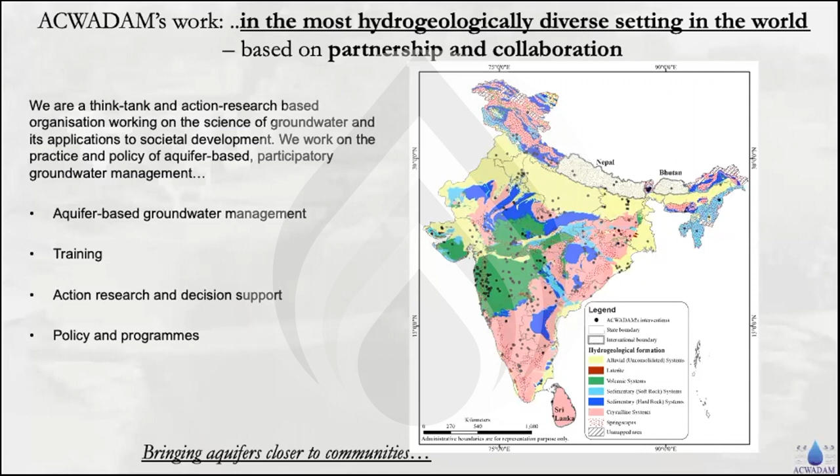We do a lot of training, capacity building. We also teach in some mainstream educational institutes in India. Our work on the ground is through the concept of action research and leading to decision support to communities. And because of a lot of our work in the first three bullets, we tend to get pulled into policies and programs. So with that brief introduction, let me jump into the subject matter straight away.

I want to begin with a quick deck of slides, where I'll talk about the importance of groundwater. It's a well-known fact today that more than half the world's population is dependent on groundwater. So pictures from across the world, from India, from the very tribal interiors of Shivpuri district of Madhya Pradesh to the central highlands in Vietnam, which in the 60s, 70s was the place not to be.

A lot of dependence in the central highlands of Vietnam is on groundwater. And the setting is very similar to where I live in Western Maharashtra. So the geological, hydrogeological setting is very similar. So we also draw upon a lot of the similarities while highlighting the differences when we look at our own work on groundwater. Western countries, Montpellier in France, still receiving a part of its water supply from a very ancient system derived from spring water. This is Marathwada and this is Tumkur in the state of Karnataka.

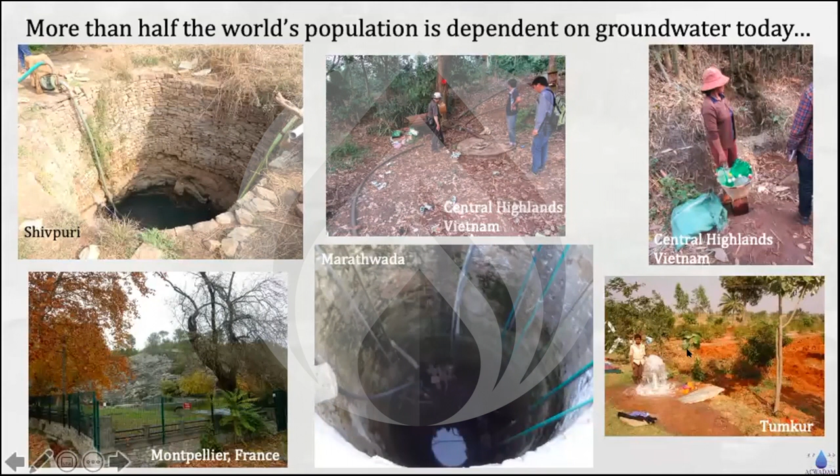So this entire dependency on groundwater across the globe means that every year at a global scale, 1,000 cubic kilometers or 1,000 billion cubic meters of groundwater is extracted. Of course, it's not uniform. As you can see, Asia alone extracts about 65% of the annual extraction. So on the continent of Asia, you see a lot of that extraction. Again, 50% of this total annual extraction is meant for irrigation or agricultural water on the continent of Asia alone.

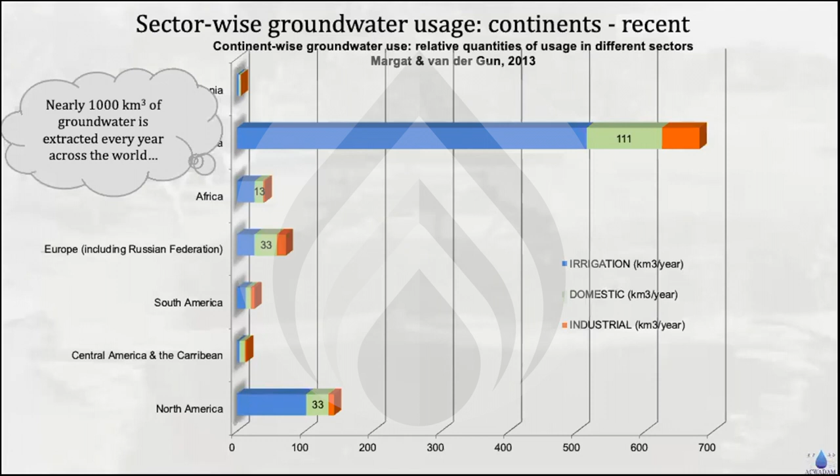The green represents domestic and the orange represents industrial. Of course, this has been taken from secondary sources, somewhat outdated, 2013. I'm sure this has changed, but it gives us a very good canvas. I would, for example, say this is perhaps the most extracted material from inside the earth. Groundwater is.

And therefore, if we step back and look at the history of groundwater across the world, the history of wells across the world goes back to about 11,000 years. And this is based on archaeological evidence and dating and so on. But in India, it goes back at least 3,000 to 4,000 years, the history of wells. So you actually have evidence that today's civilization has also a lot to do with groundwater usage over the last 5, 6, 7 centuries.

Now, I think, again, taking another step back, if you look at the legacy of groundwater usage until the 19th century, there was something unique about that history. Let's take a history of 15,000 years before present, which was the start of agriculture, which was the start of settled human living across the globe.

I'm just going to show you 2 pictures and then show you the text on the slide. So this is a very old spring in Uttarakhand, a community spring. And even today, we see mechanisms. This is below the headworks into the well section, a Persian wheel or a rahat or a mhot, as it was called in my part of the country. And you still see vestiges of this almost 2, 3, 4 centuries old tradition of wells and springs in many landscapes.

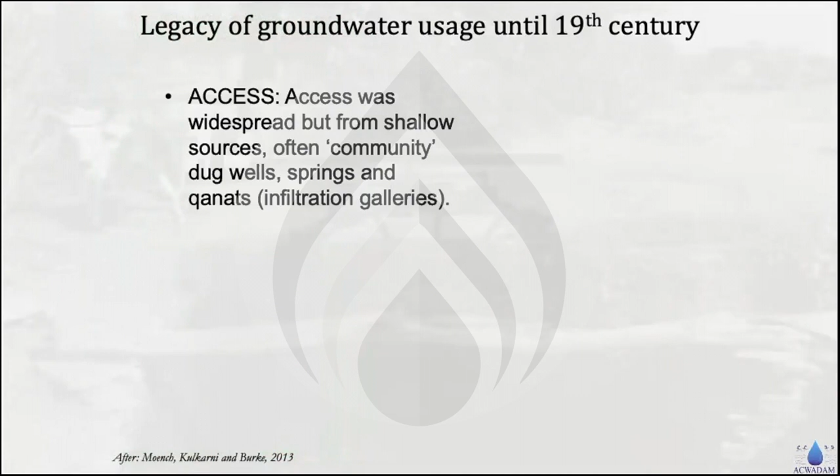And just to cull out a summary out of this work, till the 19th century, access to groundwater was widespread, but it was from shallow sources, shared or community sources, usually from hand-dug wells, springs, and in the western part of Asia and part of the Middle East, called qanats and karezes and different names. What today in engineering sciences or hydrology are called infiltration galleries.

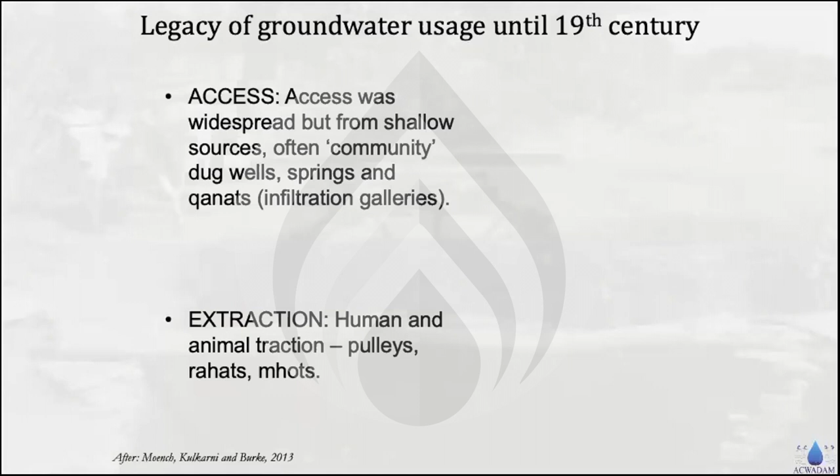Extraction was not mechanical in that sense, not driven by external fuel or power, but driven by animal traction, human traction, use of pulleys, gears. So the rahats and mhots are an evidence of that. So there was a peculiar manner of extraction. There was a peculiar manner of accessing groundwater. And this legacy, it happened over a long period of time.

Now, let's jump to the modern period. Let's jump to the last 60 to 70 years. And this is part of a larger documentary that we had made about our work, about the groundwater story in India. So I'm going to very quickly show you a snippet from this larger documentary, which will give you a summary of the last 70 years of the groundwater story in India. Many people have written about it. We ourselves talk about it, but it might be useful for all of us to go through it once more.

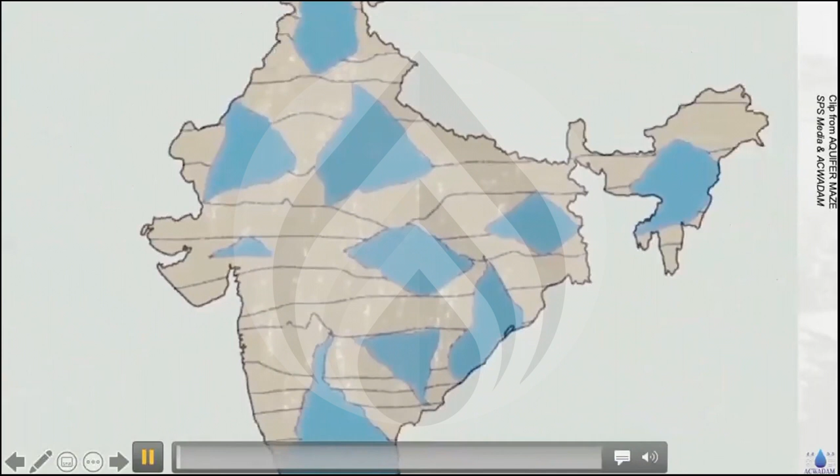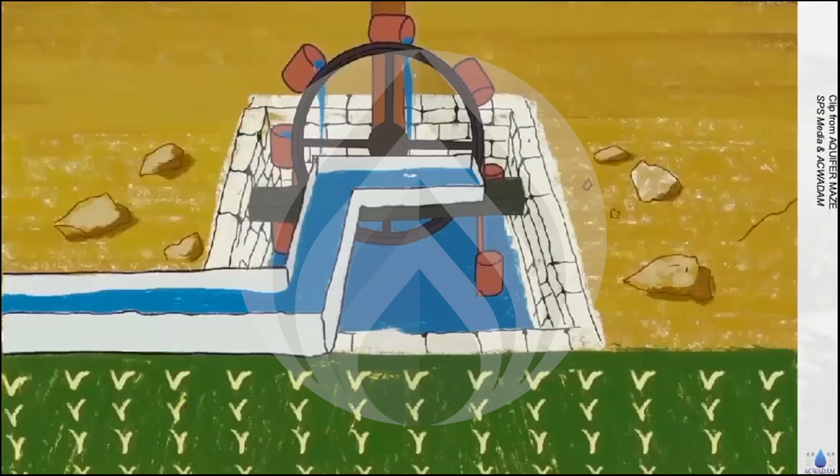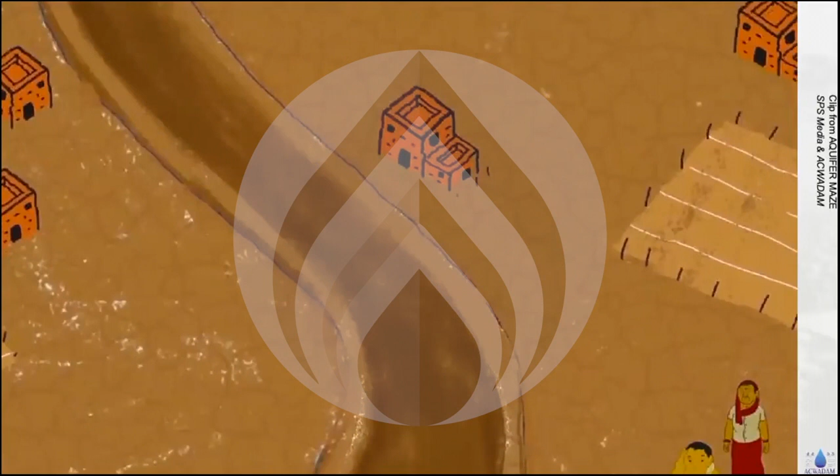India's groundwater story is quite unique. India extracts almost a quarter of the global extraction of groundwater. And what makes this story unique is the fact that India was not such a groundwater dependent country even at the time of independence. When India became independent, our vision of water management was about dams and constructing dams and canals in order to take water to people. But I believe that didn't happen for various reasons. And therefore, the last mile delivery of water wasn't achieved for many years. So the gap was actually filled by groundwater.

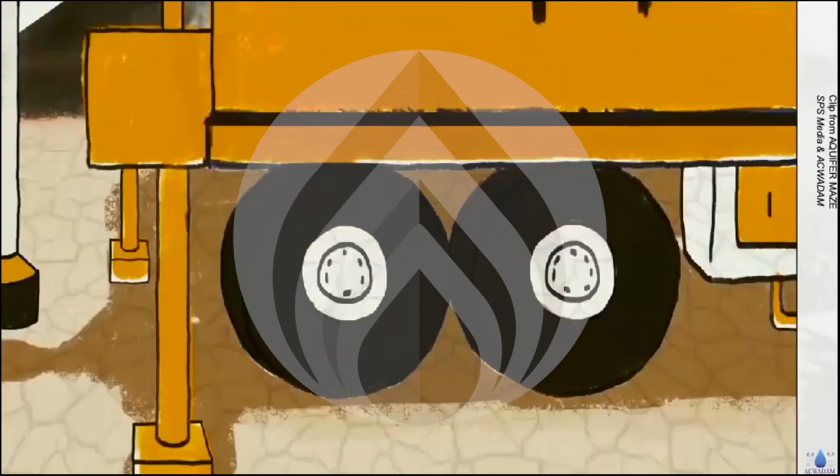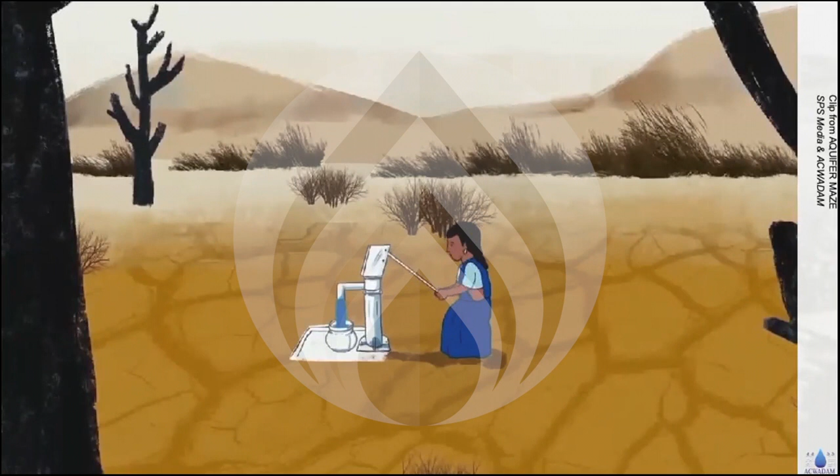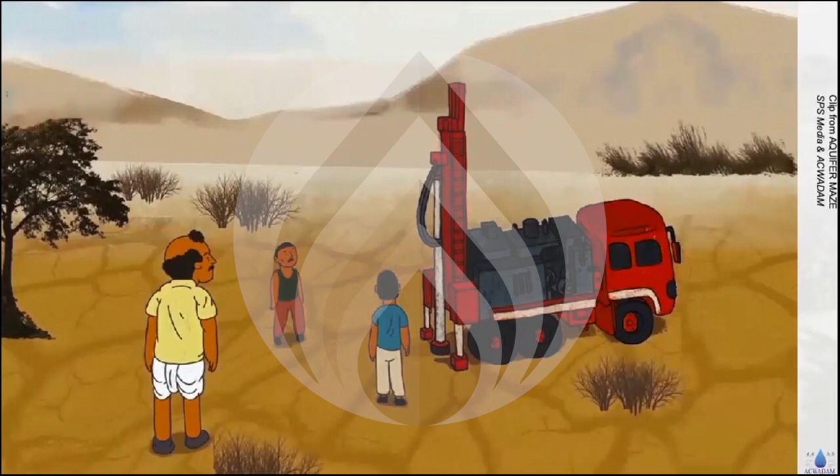Subsequently, in the 1950s and 60s, as the push for green revolution in terms of achieving food security increased, technology kicked in. And in the hard rock areas of India, for example, the borewell technology came. Droughts were also a factor or a stimulus for technology. For instance, the 1971-72 drought in Maharashtra and in large parts of western and southern India prompted infusion of the hand pump for access to drinking water. And in order to actually put in a hand pump, we brought in the technology of borewell in hard rock regions of India.

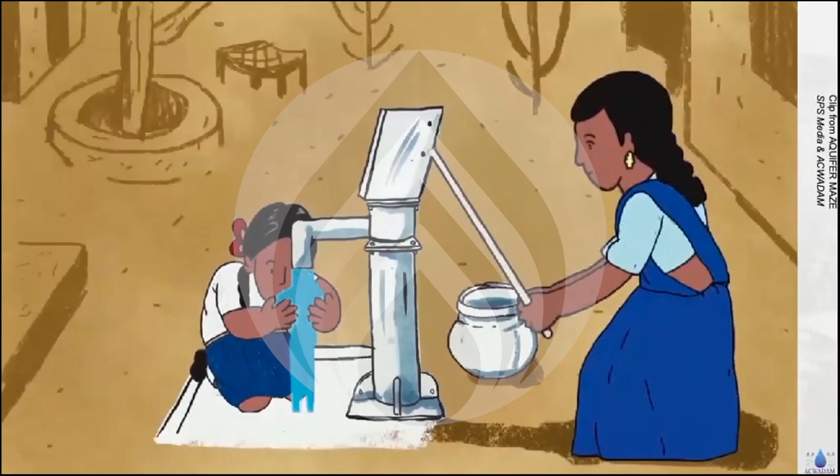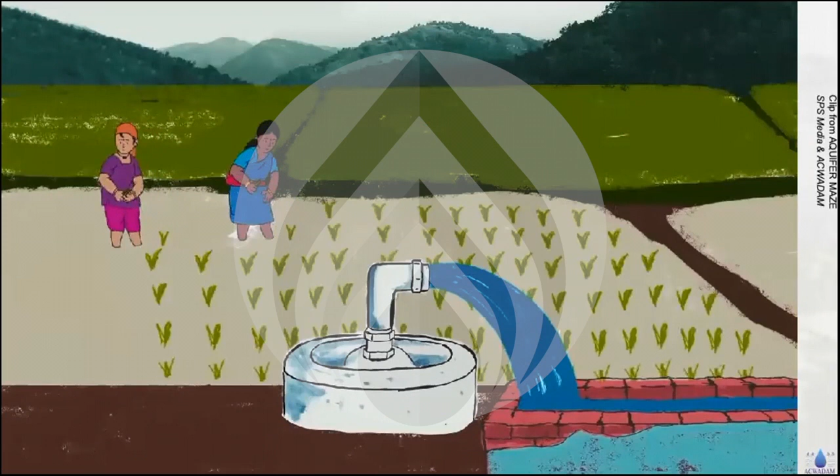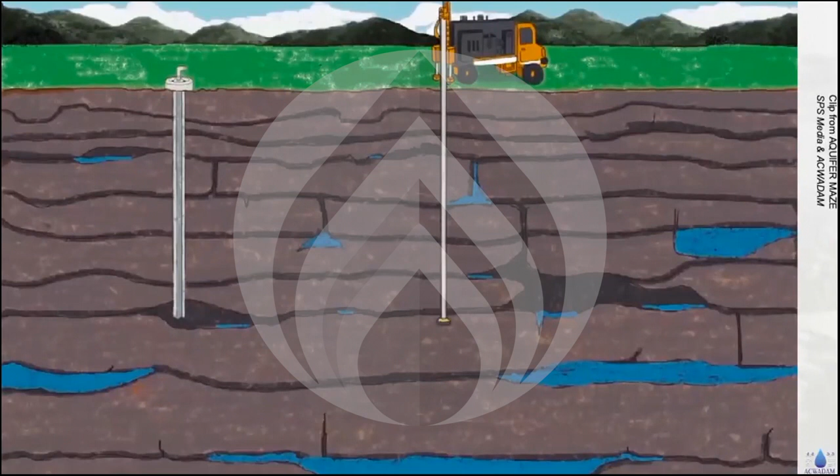Technology proliferates very rapidly. And the technology that came in for drinking water sourcing in the drought-prone regions of India quickly was taken up as technology that could access water for all regions. Urban, industrial, and moreover agriculture. As we deepened our existing wells and we drilled deeper through our boreholes, our groundwater extraction really grew.

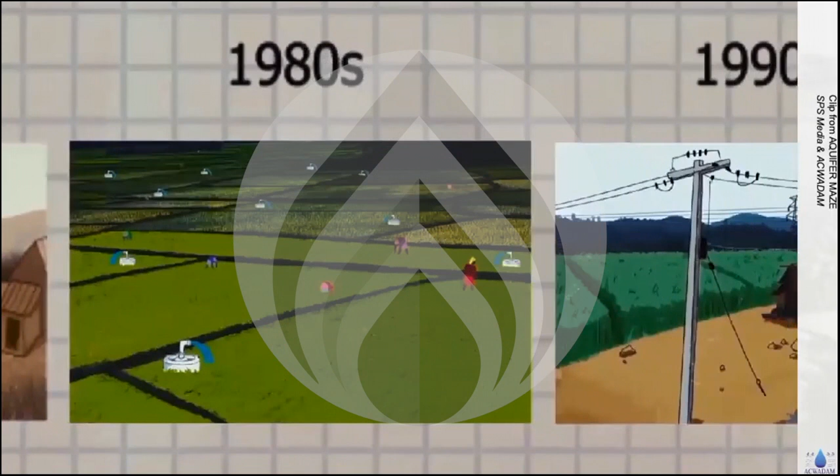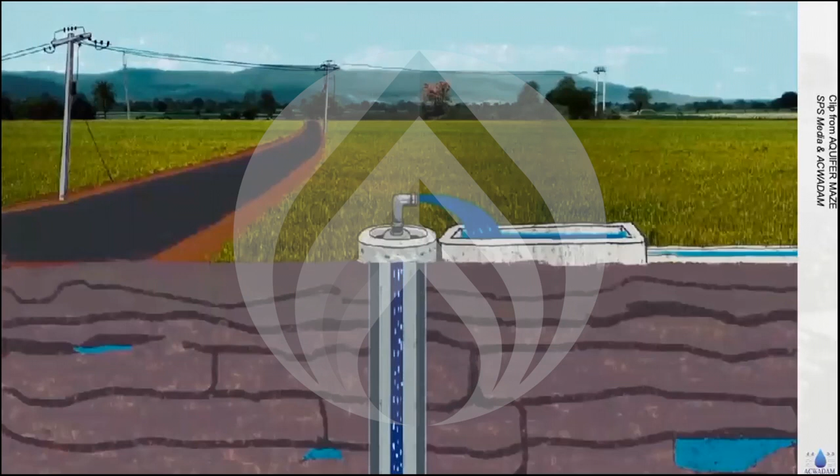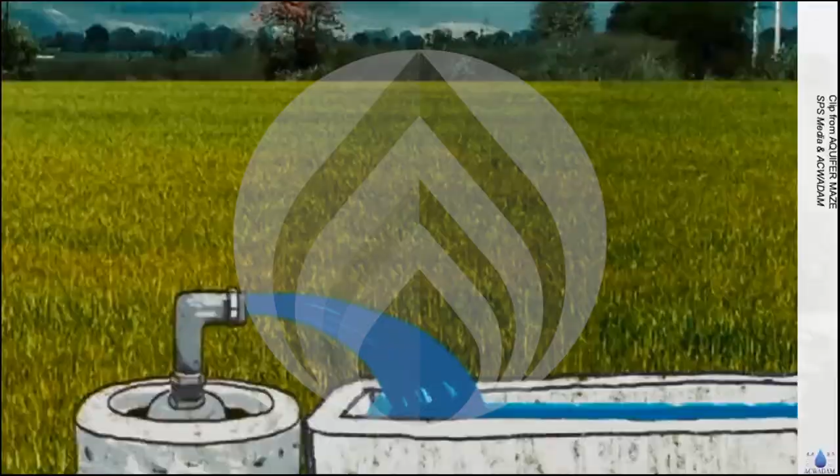Around the 1980s and subsequently even in the 1990s, with the advent of electric pumps, especially with the advent of submersible pumps, people could actually drill deeper, put in pumps at whatever depth they wanted and extract water from greater and greater depths. So in some ways, it was a race to drill deeper and a race to the pump house to install pumps of higher capacities and so on and so forth.

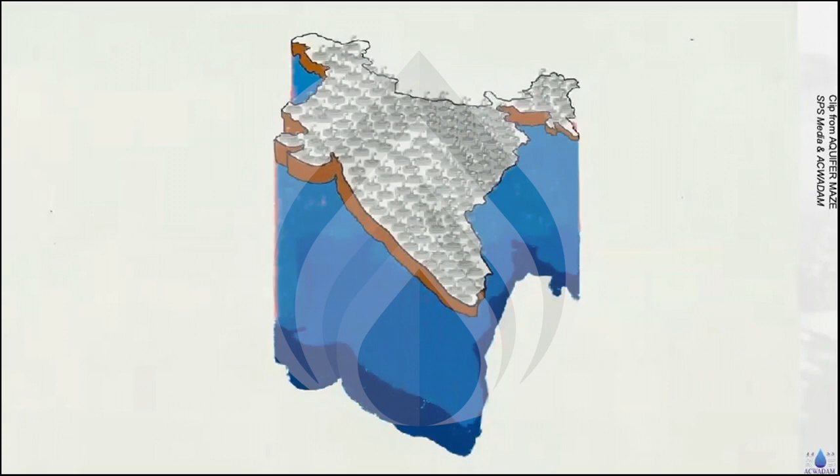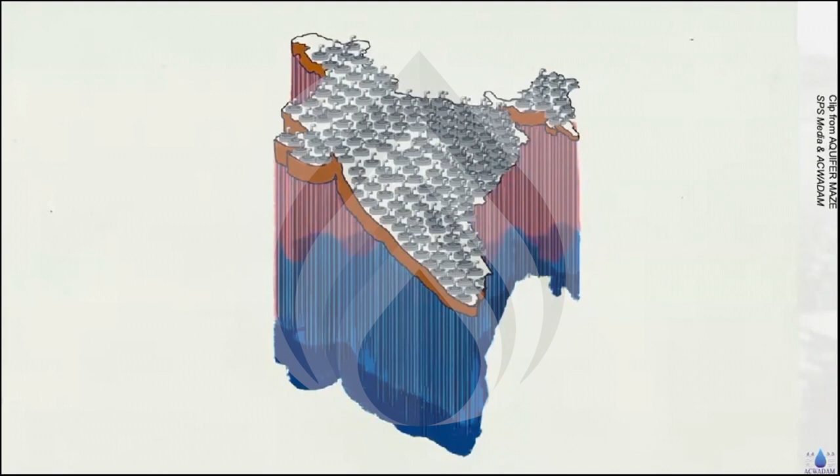So today, India is perhaps the largest user of groundwater in the world, which is a well-known fact. But we also have the largest density of wells, so roughly 30 to 40 million wells in India. And we have technologies that can access water from depths of thousands of feet, making it a very, very unique proposition.

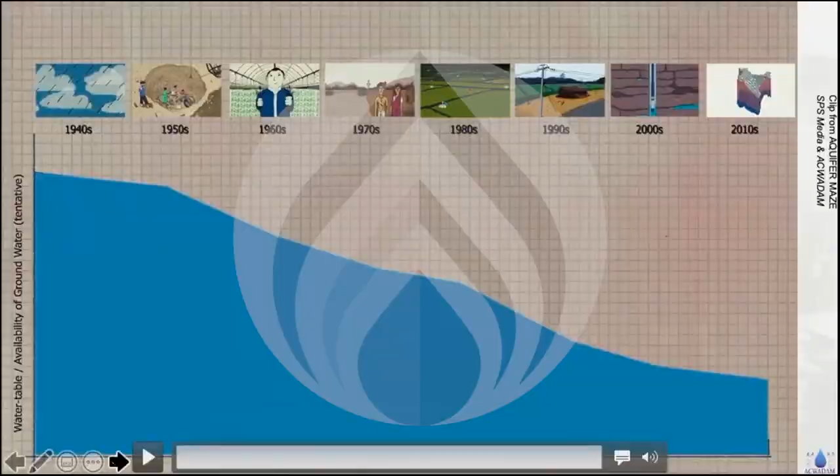So to move ahead, you've watched the video a bit, and let's leave it there at the moment.

On the other side, if you look at India's oft-unfathomed groundwater dependence, more than 90% of rural drinking water supplies come from groundwater. 70% of the water in agriculture is groundwater. Almost half of our urban and industrial supplies are groundwater based.

So much so that in fairly recent times, we have also seen a lot of wells coming up in forest areas for wildlife, for tigers. We ourselves have seen it in the central Indian forest regions. We've seen it in Melghat. We've seen it in parts of the Corbett National Park.

And, coming back to these numbers, if we combine these numbers and we extract a demographic element out of that, you can say that 1 billion Indians use groundwater every day in some way or the other in our country. And that's a huge, huge water footprint.

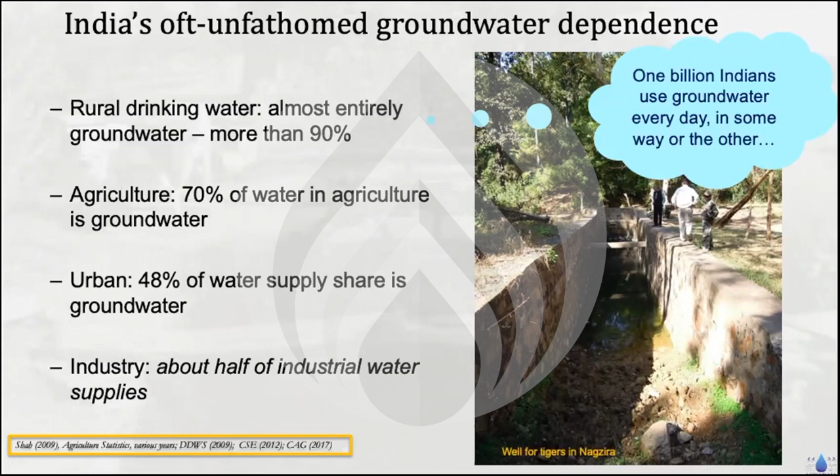Now, if we look at these two slides, then we begin to wonder, how has the legacy till the 19th century changed? And the legacy has changed on both the access and extraction counts. I could have actually presented data, but due to want of time, I haven't. But I can actually show you data on the basis of which I'm drawing these two inferences.

Access became individualized, so there were fewer and fewer community wells, and it also therefore got privatized in more ways than one. My well, my water, whatever's underneath my land is my water. And it happened through, as the film showed, deepening of dug wells, drilling of bore wells in parts of Karnataka, Telangana, Andhra Pradesh, and Maharashtra. There was a phase in which we had something called dug-cum-bore wells, where bore wells were drilled at the base of dug wells, and so on.

So shallow levels, intermediate levels, deep levels, we have tapped all the possible depths from which we can extract groundwater. And extraction, again, as the film showed, transitioned from animal or human power to mechanical devices like the diesel pumps initially, then the electric pumps, and then, of course, the submersible pumps. So high-end pumps capable of extracting large volumes of water over short periods of time. So that's another dimension where we began to extract lots of water within shorter time frames. And it's important to remember this.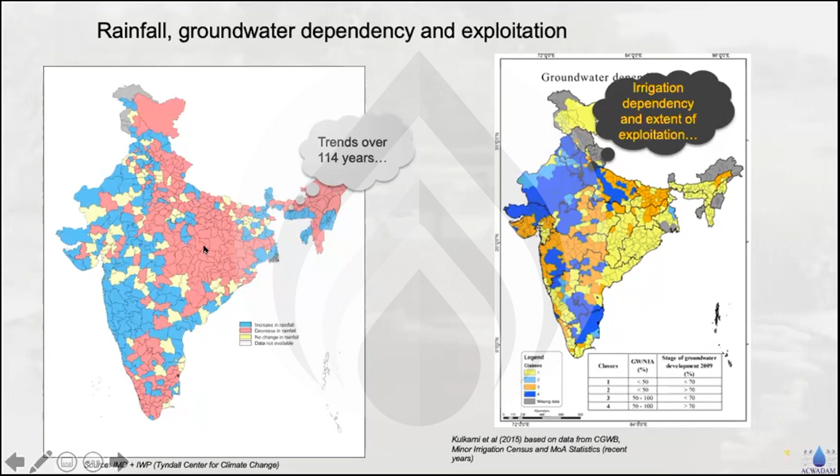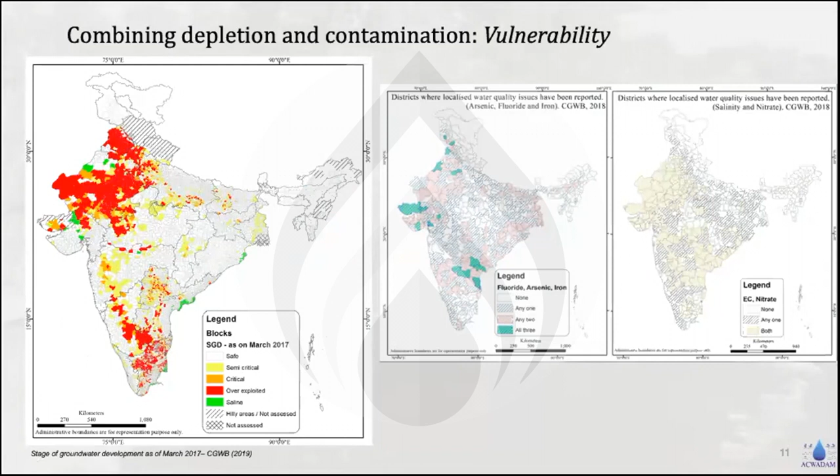If we then, as a second level, combine areas of depletion or overexploitation and areas of contamination. So this is the CGWB's data from 2017. And if we combine it with their own data sets on arsenic, fluoride, iron, salinity, and nitrate, at a very, very gross level, we can say that 60 to 70% of the districts in India have become vulnerable to either a depletion problem or a contamination problem.

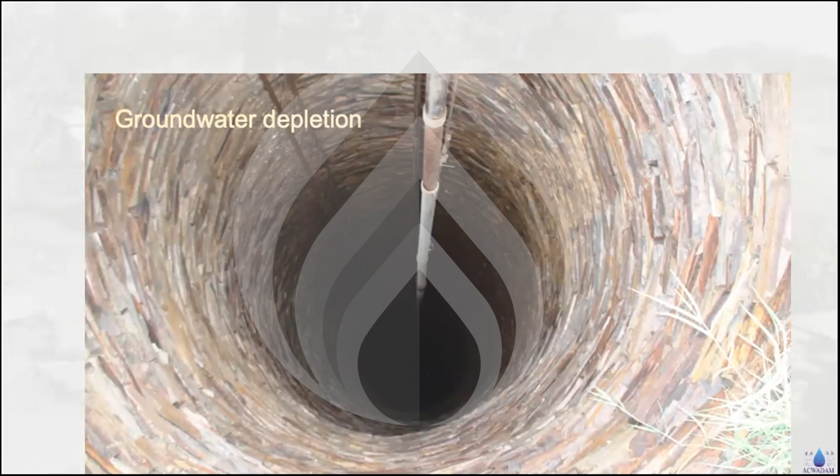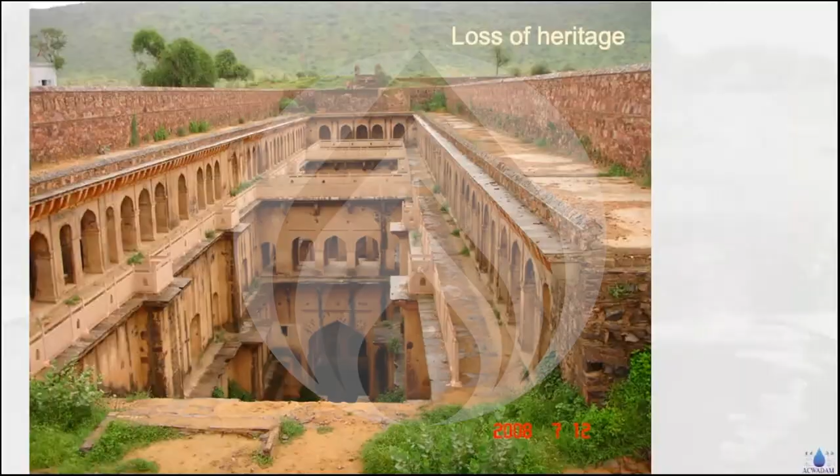And now, therefore, if we come out with the 2 or 3 sets of major problems we are facing on groundwater, one is, of course, depletion, falling water levels, wells going dry, some traditional systems or heritage structures of water, like the Neemrana well in Rajasthan, completely gone. So along with the decline in water levels, that whole legacy till the 19th century is lost on many, many fronts. Water quality has serious implications on human health. And if we are so dependent on groundwater, any contamination is certainly going to affect human health.

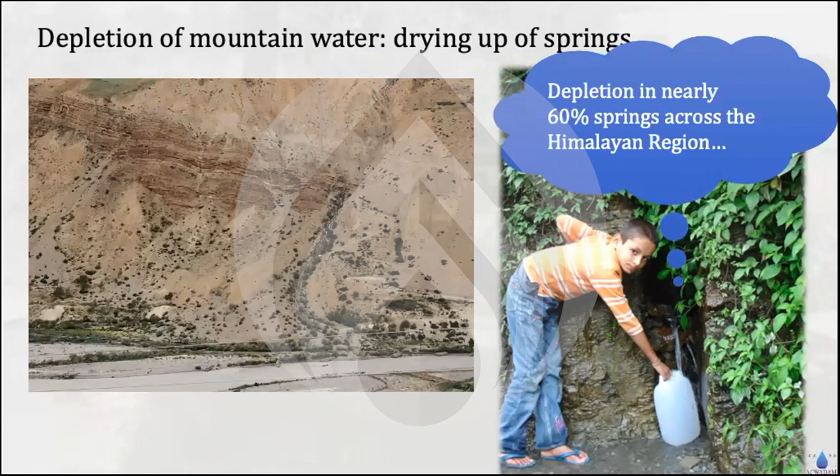So fluorosis, arsenicosis, high salinity, and a lot of distress. In the mountains, the springs that form the lifeline of mountain water supplies are running dry. And there are various reasons, but it's a part of the whole problem. In the Himalayan region, for example, our work has indicated that at least 60% of springs have declined in terms of the discharge they deliver.

Last but not least, groundwater depletion has led to the drying up of a variety of water bodies, rivers, for example, lakes in different areas, even small ponds. And we'll try and understand this as we go along. So how do you deal with this problem?

And one of the reasons why we've not been able to deal with these problems for some years at least is: how do we recognize the resource of groundwater? Do we recognize it as a part of the water cycle? Do we recognize it as a part of a river basin? Do we recognize it as a part of a watershed? Where is the identity for groundwater? Because unless and until you take the identity of groundwater beyond a well or a borehole or a tube well, the whole argument remains incomplete.

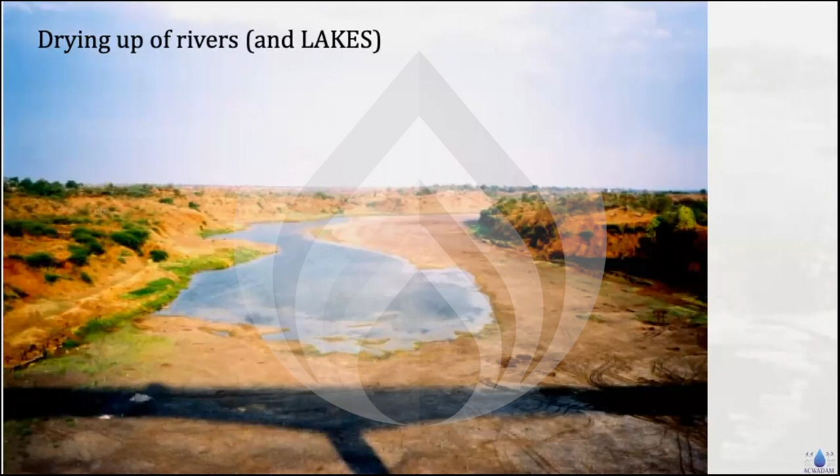How do you define the resource of groundwater? And that's the reason why you need a context. Surface water is essentially flow. We construct reservoirs, dams, artificial lakes to convert that flow into stocks.

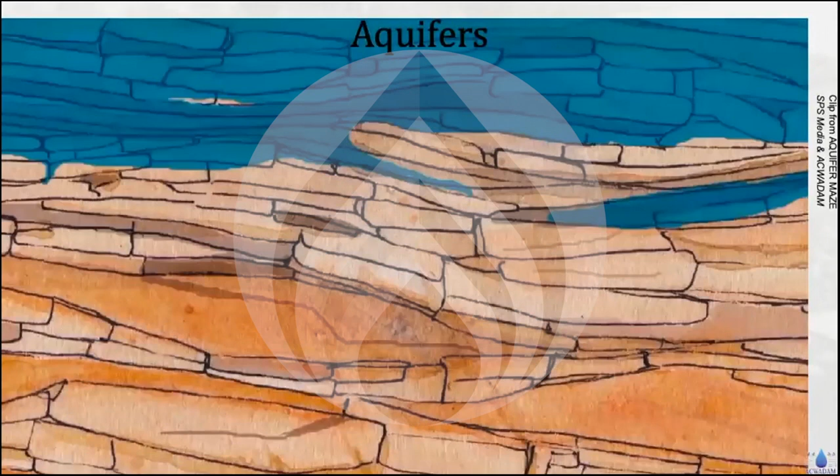Once water percolates or infiltrates into the ground and becomes groundwater, it gets stored in openings or spaces within rocks and material derived from rocks. Once water enters the open matrix of rocks, it slows down and it essentially becomes more of stock than flows. Groundwater also flows, but it depends on the properties of rocks.

So, like the little video explained, it's really the rocks inside the ground that constitute aquifers. They also must have properties that allow water largely to be stored in the openings in rocks. And these openings must be sufficiently interconnected for groundwater to flow from one point to the other across the stock of groundwater, and therefore deliver that water to wells and springs.

So for example, this is a spring in a rock high up in the Himalayan mountains. And it gives, on average, about 50 liters per minute. For a spring like this to constantly give you 50 liters per minute over 365 days, the amount of water coming out of the spring in 1 year is in excess of 25,000 cubic meters. Now, in order to deliver 25,000 cubic meters, this spring must be connected to a much larger store of groundwater, which is called the aquifer.

So this is a very, very simplistic definition of groundwater. The more formal definition is given here, and I'll quickly run the video. So now we actually have a definite description of groundwater, which is about rocks that are sufficiently saturated with water. Therefore, they can store water, they can transmit water reasonably enough so that water is available to sources of water supplies like springs and wells.

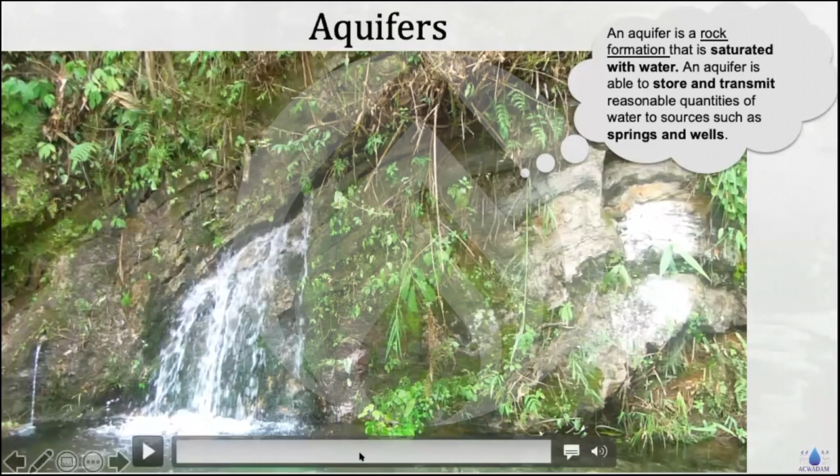And taking this definition forward, if we begin to think through what's happening to our aquifers, then groundwater depletion and contamination has many, many more dimensions than we ever imagined. The first and foremost is what's the balance between recharge and extraction. So as an aquifer gets depleted, the balance between recharge and extraction gets disturbed.

But my point of argument is, if you look at B and G, they show you the same magnitude of arrows. The arrows are of the same size. If you only look at recharge and extraction, you will be misguided, and you might think that an area under B and an area under G have possibly the same groundwater endowments. But when you look at the stocks, you find that the stock has depleted. So it's unlike the filling and emptying of a vessel. This stock is extremely important, and that is the reason why understanding aquifers becomes important.

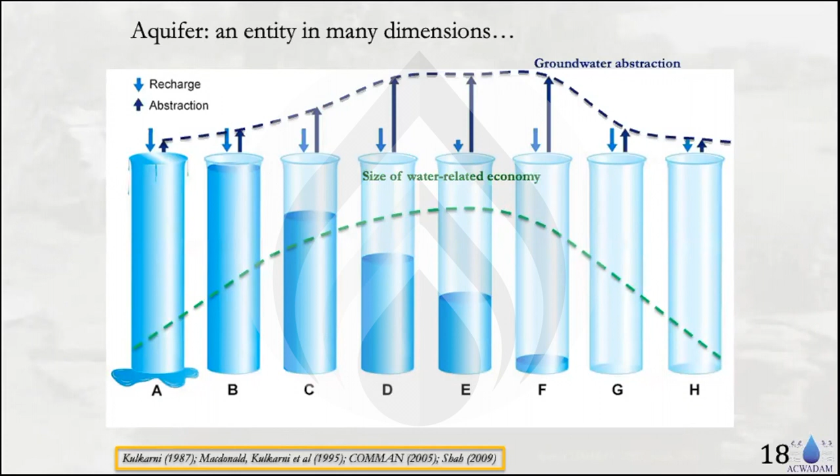But when an aquifer depletes, consider for a moment that this is a single aquifer with a history of depletion. The history of depletion is not just about how water availability went down, how the amount of extraction went down. It's also about how it has impacted the water-related economy on one side, say agricultural productivity, agricultural incomes.

How, for example, energy: if 1 unit of energy was required to pump out 1 unit of water in situation A, then it's very likely that there's still some water at the base of these two systems. Then 1 unit of water would probably need 10 units of energy. The same unit of water would require 10 units of energy to pump out. So it has the energy dimension.

The drinking water security in an area would drop as a consequence of aquifer depletion. The groundwater quality would also drop as the stocks in the aquifer get depleted. And last but not least, aquifers also provide another important service, and that service is in the form of base flows, or aquifers letting out their water through rivers, lakes, streams, and even small brooks on the land surface. So in some ways, aquifers provide certain ecosystem services to ecosystems like rivers and lakes. And this is also something we need to remember.

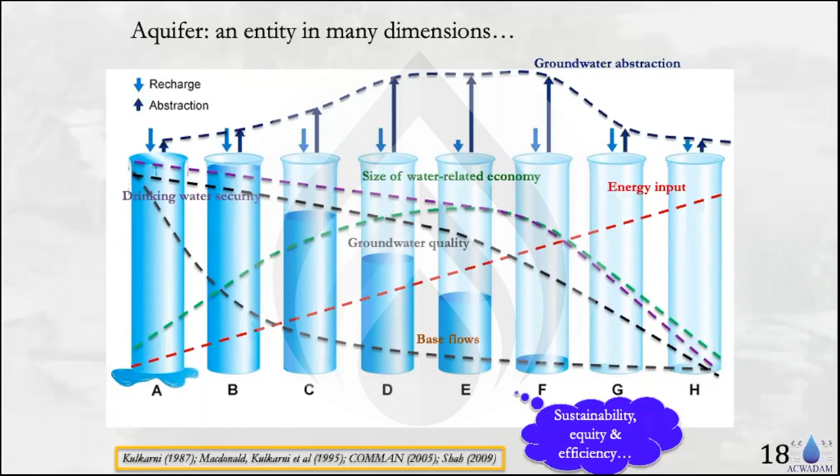So an aquifer is actually an entity in many dimensions: social, hydrological, engineering, environmental, economic, and from the energy angle. And that's one reason why, in working out sustainable, equitable, and efficient solutions, it's time for us to wake up and think through the aquifer lens. Aquifer not necessarily as a hypothetical scientific entity, but aquifer as a transdisciplinary entity which allows us to articulate sustainable, equitable, and efficient management of groundwater. Okay.

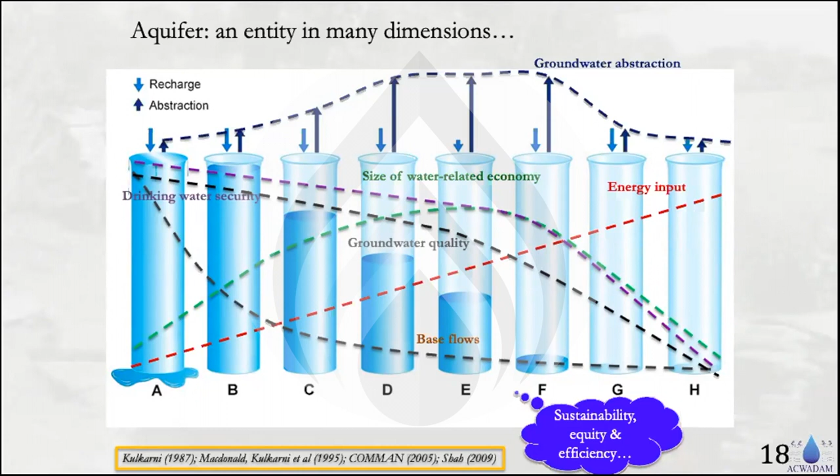Just to summarize that, aquifers are the real resource of groundwater that is part of the larger water systems. Aquifers are the correct hydrological unit for understanding and managing groundwater, because when we talk of large surface water systems, we talk of river basins. When we talk of smaller units, we talk of watersheds. Why not aquifers when we talk of groundwater? Aquifers represent a typical common pool resource.

And you can understand the science of groundwater much better through the science of aquifers, and bring a more multidisciplinary process to bear upon the process of groundwater management. You can also demystify knowledge and information through this lens. Why do we need to do all this? Because today, in a country like India, we need democratization of knowledge outcomes in order for communities collectively to take certain decisions that will lead to robust collective action.

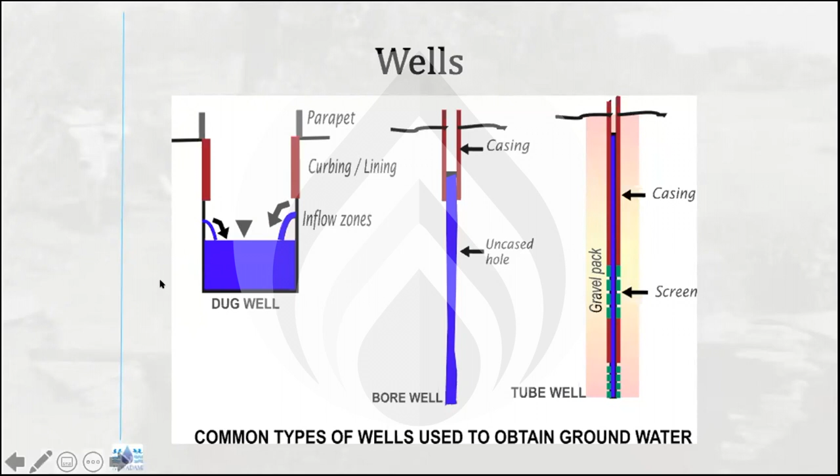Okay. Wells, for example. Like I said, if there's one thing India could be proud of, I believe India is a dug well civilization. I don't think any other country in the world has as many dug wells or has had as many dug wells as India has had. So again, for me, dug wells are very, very common across this typology. You find dug wells almost everywhere, maybe less in the mountains, but in all the other regions, you find dug wells.

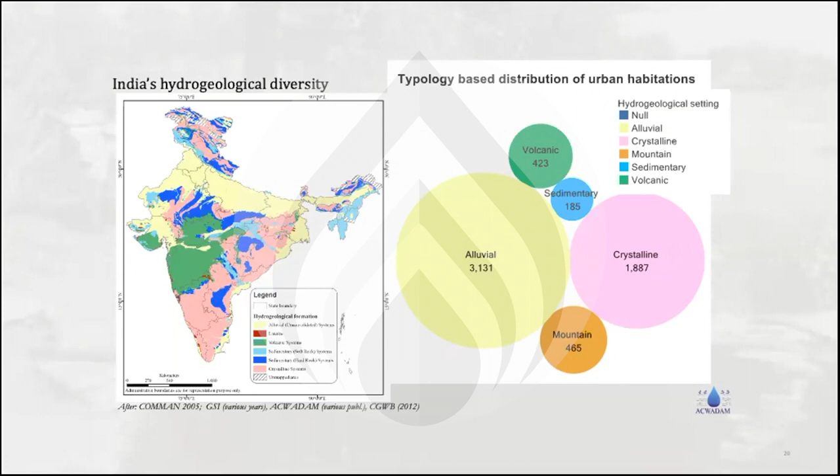Boreholes in the hard rock regions of India and tube wells in the alluvial regions of India. So even if you look at a classical infrastructure context to India's aquifer systems, you have a horses for courses legacy from many, many years, also in the modern period.

Now, with that argument, I want to pose 2 or 3 other very important arguments. If we actually look at the definition of the environment, and I often think I'm still a sort of school student, and that's how I think through this process. So the environment is made up of spheres. We all know this. Now, each sphere for me is actually an ecosystem. And classically, the way ecosystems are defined is a little more generic.

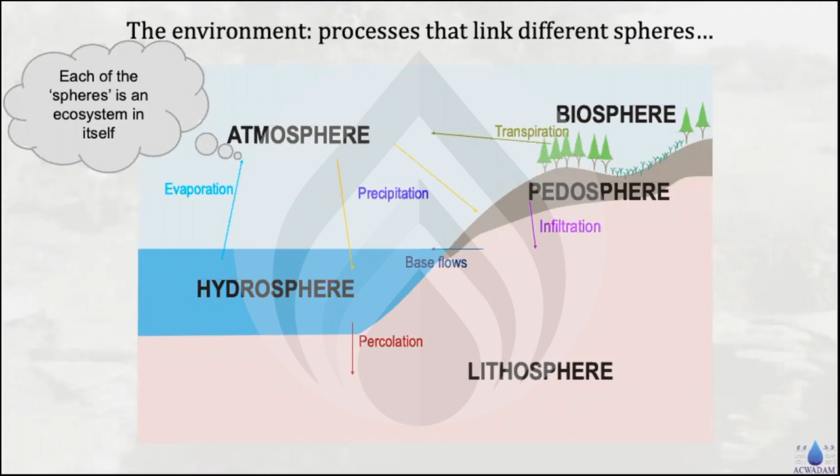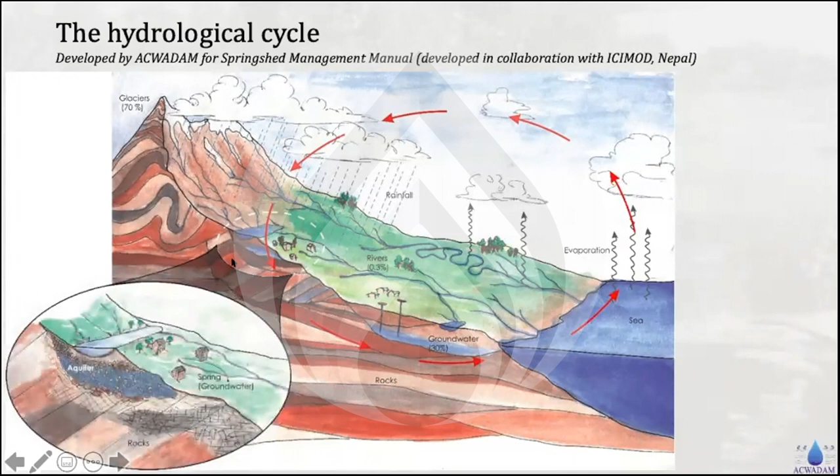Similarly, in the hydrological cycle itself, I actually see the embedding of different environments and ecosystems. Now, one of the big gaps in a lot of the arguments made on the water cycle front is usually the argument for groundwater begins and ends with infiltration, water that goes into the ground, and a little bit with exfiltration. When we actually look at this system in a little more detail, what we find is this itself is a smaller sub-cycle of the larger water cycle. And it's not a one-way cycle.

Most people tend to believe that it's only the recharge part which is important in an aquifer understanding. An aquifer is nothing but an interim storage of water that allows water to come in, called recharge, and that also discharges groundwater onto the surface, which is called discharge. But I think this needs to be understood in each of the aquifer typologies and in specific contexts, rural, urban, ecosystems, and many, many more things.

Now, I'm going to show you a very quick set of real examples from the field. So this first example is about the dynamic nature of groundwater. 3 villages from eastern India, part of Jharkhand, 1 village I think in the western part of West Bengal. This is from Jharkhand. And we developed a demand or a usage-based groundwater balance. The reference here was 2014-15.

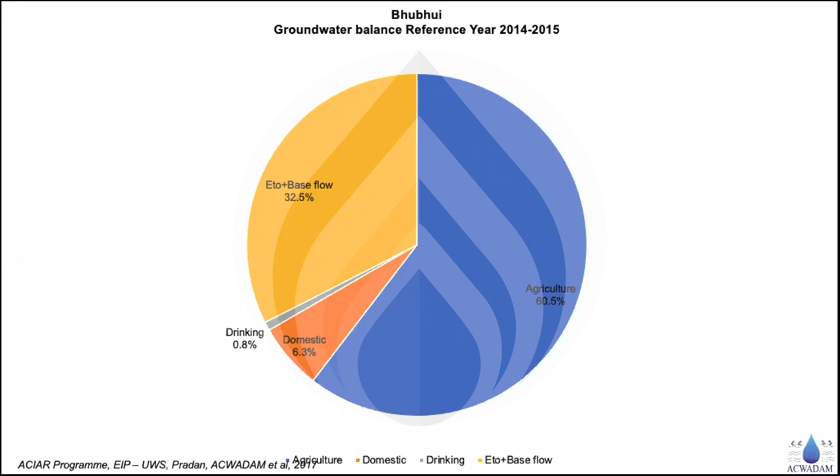And from this balance, we can clearly draw an inference, and this is all groundwater irrigated, that this particular village is significantly irrigated by groundwater. The proportion of groundwater in agriculture, 60.5% usage, is significantly high. Now, what also happened in the same village, when we started comparing the total aquifer storage, which is the first bar, recharge, which is the second bar, and discharge from groundwater, both pumping and natural, that's the third bar.

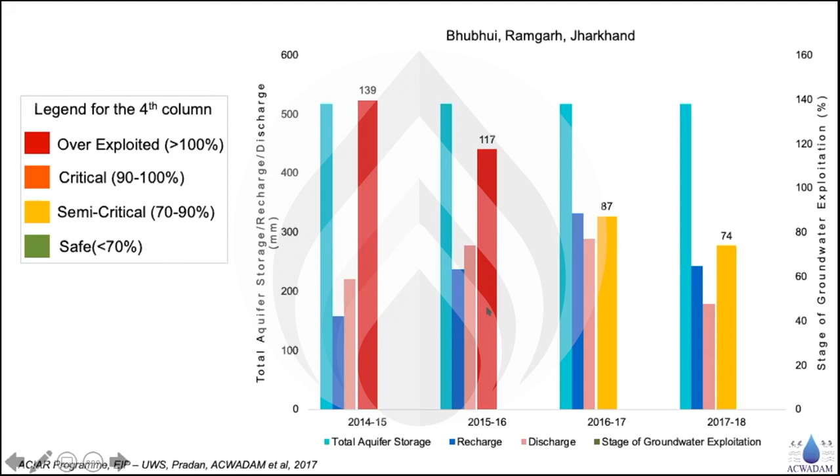And when we took these numbers and used the CGWB's national level assessment of groundwater, we found that across 4 years, the assessment was different. The first year showed that the aquifer was overexploited. The second year, again overexploited. The third year, semi-critical, and the fourth year, semi-critical or something. So it's very, very dynamic in that sense. I'm not going to spend too much time on the other 2 examples.

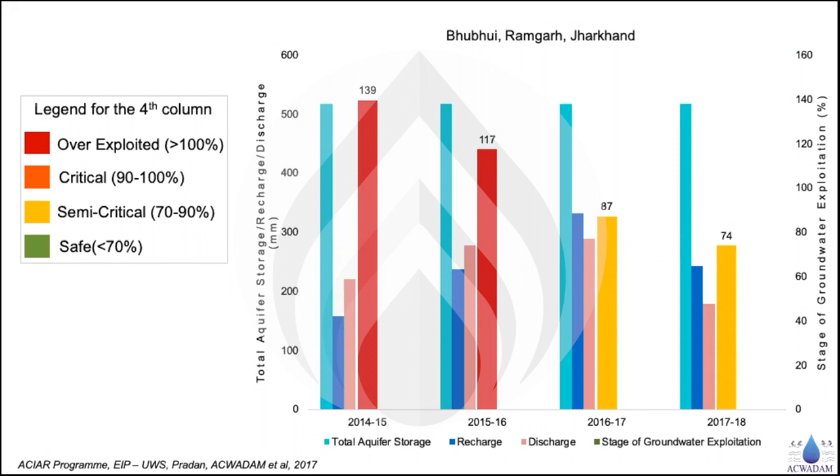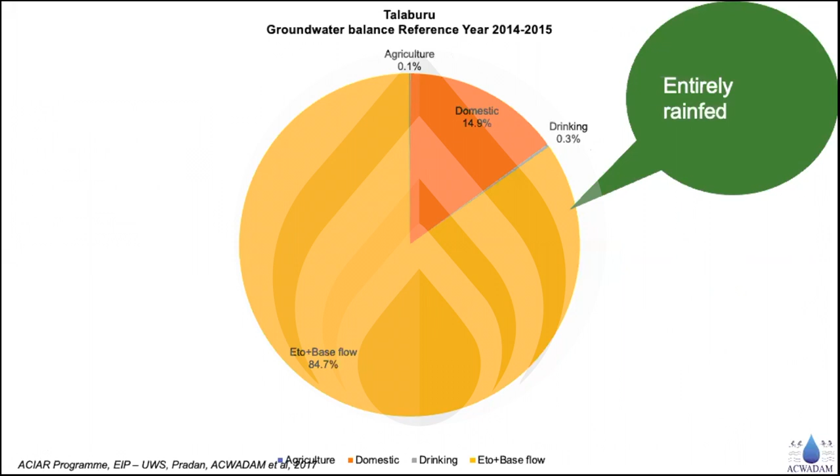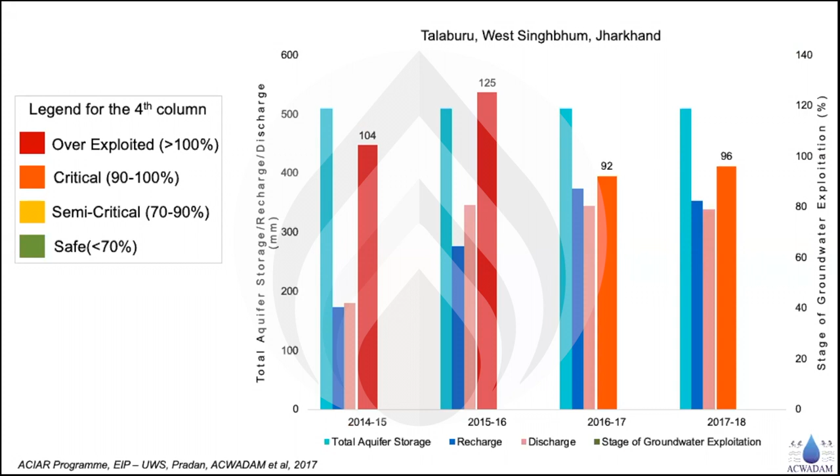The third village was entirely rain-fed. There's hardly any exogenous water used in agriculture, and it looks very different. And yet, it shows a certainly different kind of dynamics on groundwater. Of course, one must remember that in each of these villages, the total aquifer storage, because they are in 3 different aquifer settings, is very different. So in this village, roughly 500 millimeters equivalent.

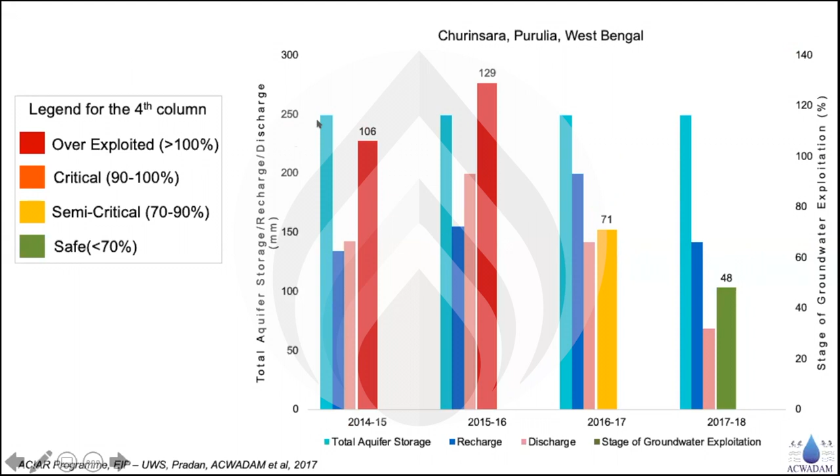In here, it's only 250, half of that. And in the first village, it's actually a little more than 500. So these are the kind of numbers, or this is also the kind of quantitative assessments that you can make.

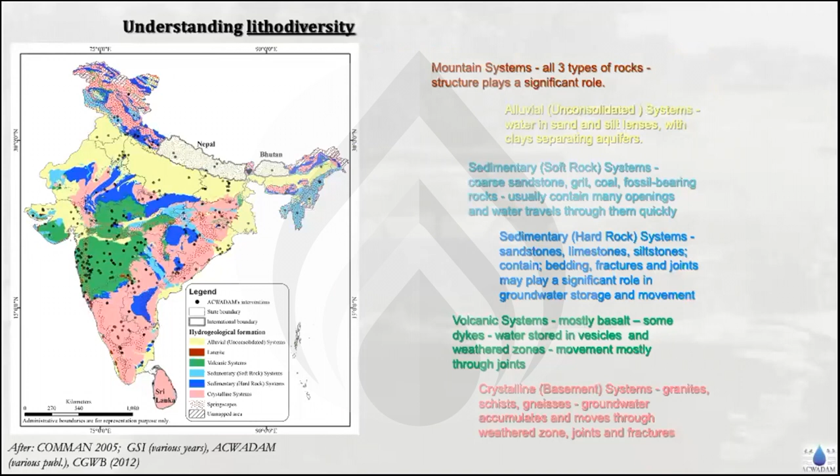Now, again, coming back to understanding this lithodiversity or hydrogeological diversity across India's large landscape, it's important. And I'll briefly tell you through 2 examples. So here, for example, in Pune, we are doing some work on aquifer mapping and understanding urban aquifers, managing urban groundwater, and so on and so forth. So I've just taken a picture of one lake. And since this is about lakes, I thought I'll just end with these 2 examples.

So Katraj Lake in Pune, and this is a short history from 1985 till 2020. And you see changes. Over this almost 40-year period, you see a big change. One big change you see is the neighborhood of the lake was fairly barren. It was all agriculture in 1985. It's an old Landsat imagery. Then in 2004, you can actually see a green area developing around the lake. Develops, and today it's fairly green.

So the lake itself, the immediate neighborhood of the lake has actually turned greener. And there was an effort to do that. Trees were planted, forest was cultivated. There are actually two lakes. There's an upper lake and a lower lake.

But if you actually look at the water and the quality of water, especially in these last three images, then despite the greening of the neighborhood, the quality of water, especially the growth of unwanted vegetation, for example. Also, because of the urbanization around the lake, you can see how it's gone up. The release of certain kind of wastewater effluents into the lake has actually led to a certain deterioration in the quality of that lake water.

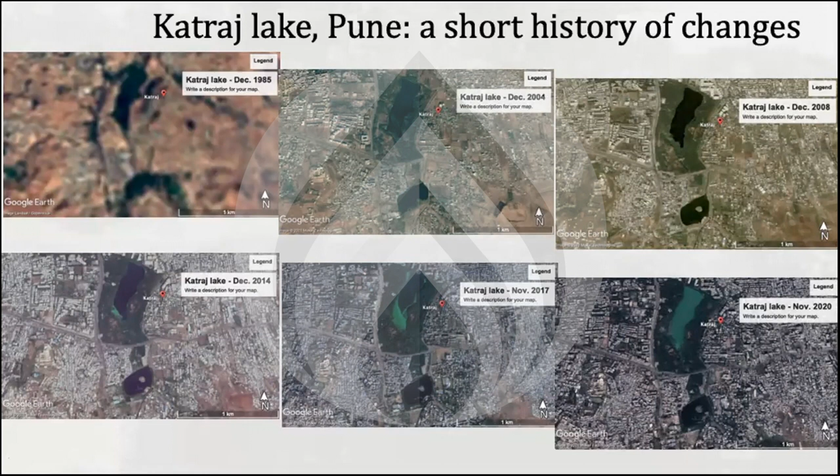The other thing, and this is again something that we are just discovering right now, is a lot of the earlier inflow to the lake has reduced. Not so much because of the catchment, of course the catchment has been affected, but a lot of wells came up as a part of the urbanization and they started pumping. So the natural base flow contribution to a system like this has gone down. We are still in the progress of studying this, but I thought I'd just flag that as an important element.

Then I'll talk a little bit about Sarjapura, and this is where we worked with Biome some years back. A lot of people talk about, okay, what is the role of a lake in terms of groundwater? And the popular notion is, if you have a lake, then it keeps recharging the groundwater in the surrounding areas. Now, there is no one-way traffic in nature. Nature is always a two-way traffic. Nature always claps with two hands.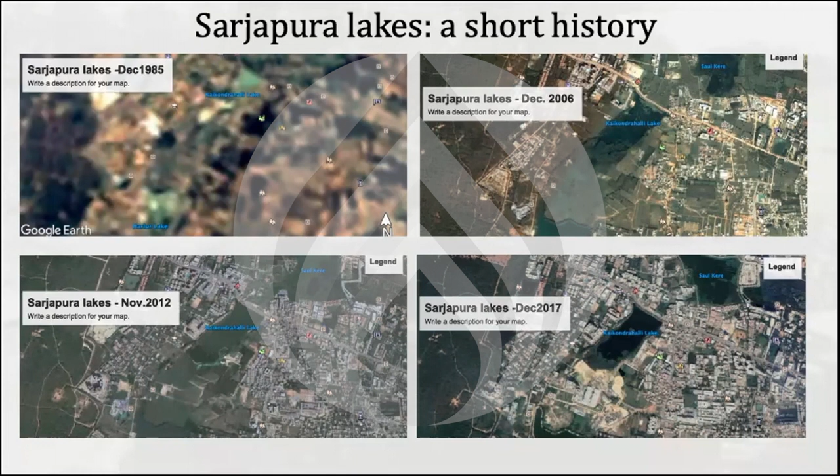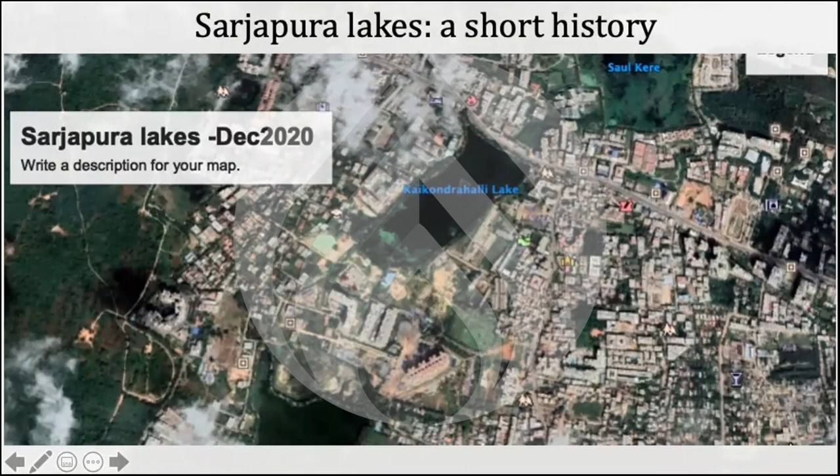Now, even in Sarjapura, what we discovered, and of course, these are the changes that you see, but I think more important was when we looked at the relationship between the Kaikondrahalli lake and the adjoining wells, and a lot of people contributed to that whole study. It was a fully participatory study. I may come to this. I'll just show you the results from that.

So what we found was in the pre-monsoon period, especially when the wells were not pumped, the groundwater levels in the aquifers stood slightly above the stage of the lake. And in that period, groundwater tended to flow into the lake. So especially when the inflow into the lake stopped and the water levels in the lake dropped, especially when dug wells were not pumped, there were phases in which water was going into them.

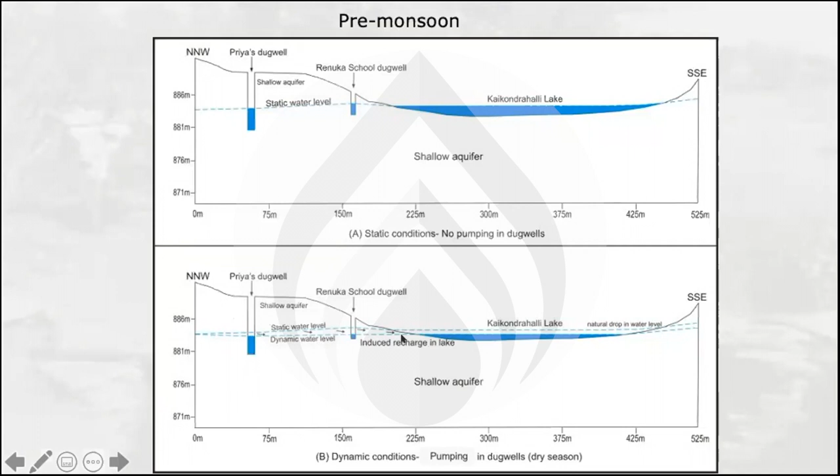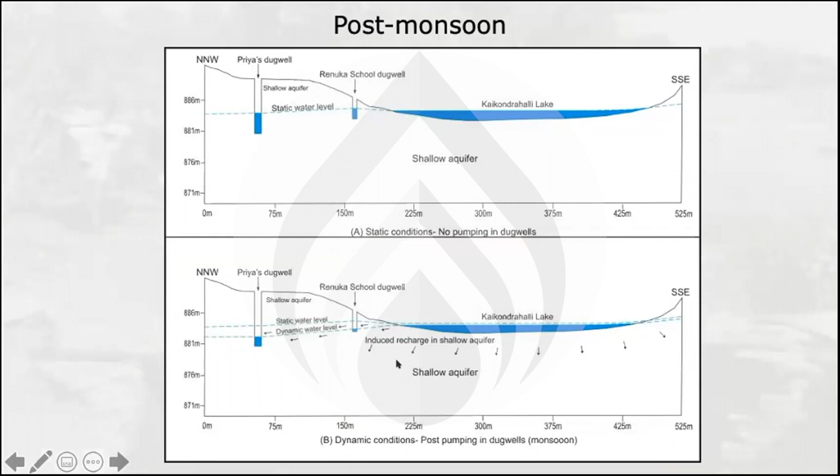But when the dug wells remained pumped and when the water levels in the aquifers dropped below the level in the lake, the lake started giving to groundwater, discharging to groundwater. This was in the pre-monsoon period. In the post-monsoon period, for a larger period of time, when there was sufficient inflow into the lakes, pumping was somewhat reduced, but most of the times the lake was actually contributing to this whole system.

I'm just going to end with a simple concept on this lake groundwater interface. And the lake groundwater interface also requires a lot of studies.

And it's again going to be perhaps one of the next sort of research ideas for the next few years. So I was looking at a system in Pune, an aquifer I studied for almost 15 years. And I actually saw this story that I told you in the video unfolding before my eyes as a student.

In the year 1983, the water levels in this particular well were at ground level. The well used to overflow for a few days during the monsoon. The summer water levels were only about 3 to 4 meters below ground level, and that's the total thickness of the aquifer. And as the water levels dropped,

there was a stream about 100 meters from the well, and I could almost see this change. So this is the bed level of the stream. In the earlier years, the stream used to run dry possibly for 1 or 2 months. There was water in the stream for 10 to 11 months. As groundwater levels in the aquifer dropped, you can see that, for example, in 86, there was hardly maybe 3-4 months beyond the monsoon when the stream was flowing.

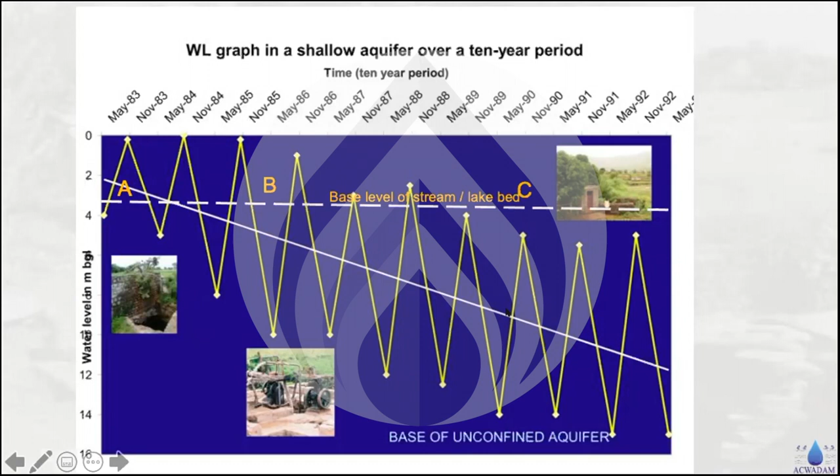So much so that from 1989, 90 onwards, the stream did not show any base flow at all. Because even after recharge to the aquifer, the monsoon levels in the well, in the adjoining aquifers, remained below the bed level of the stream. So it's important for us to understand that the lake or the stream and groundwater interface is also going to depend on the status of groundwater stocks in the aquifer.

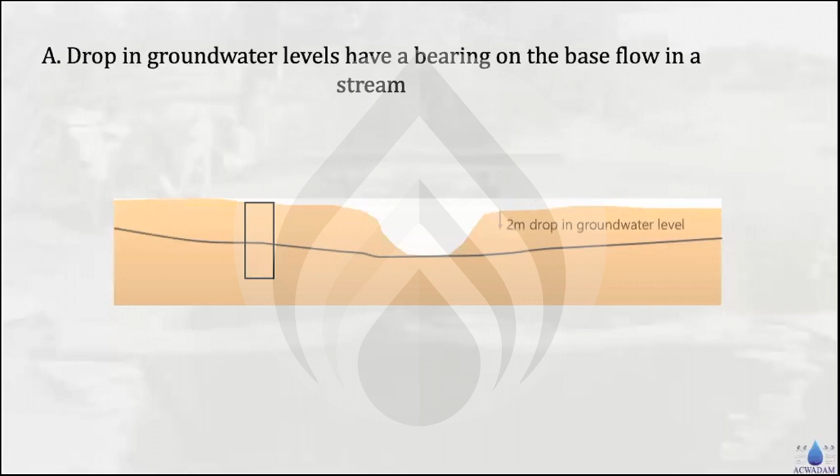In the case of A, for example, and I've just animated it a bit, this is the monsoon water level in the well and in the adjoining water body, which is a stream. It could also be a lake. It dropped in summer and the stream went dry. There was a 2-meter drop over here. The stream went dry. There may have been some trickles here.

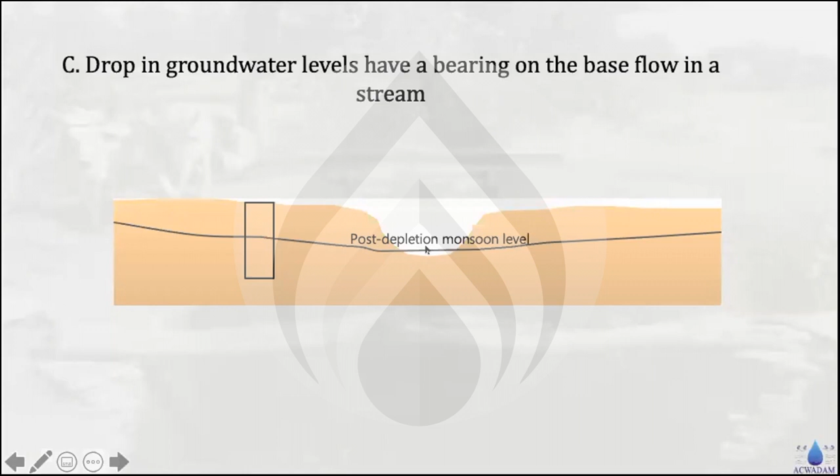I'll actually end on that note. I could have shown you a few more things, but I don't want to go ahead. So I think the context of aquifers is not just limited to the management of groundwater, who should use how much, should agriculture use, what is the cropping pattern we should grow, so on and so forth. So that's a direct means of management. But I think we need to bring that understanding of aquifers into other problems like urban water security or ecosystem security or the whole relationship between ecosystems and groundwater.

And I refrain from showing you one of the dimensions of our work, which is spring revival. But I'll end on that note that in the city of Pune, even as we talk today, we have gone to the municipality, and we have actually identified 30 to 40 springs along the course of our 2 major rivers, the Mula and Mutha, which then becomes the Mula Mutha. So along the entire main river course in Pune, we have identified locations where groundwater naturally discharges to the river water body.

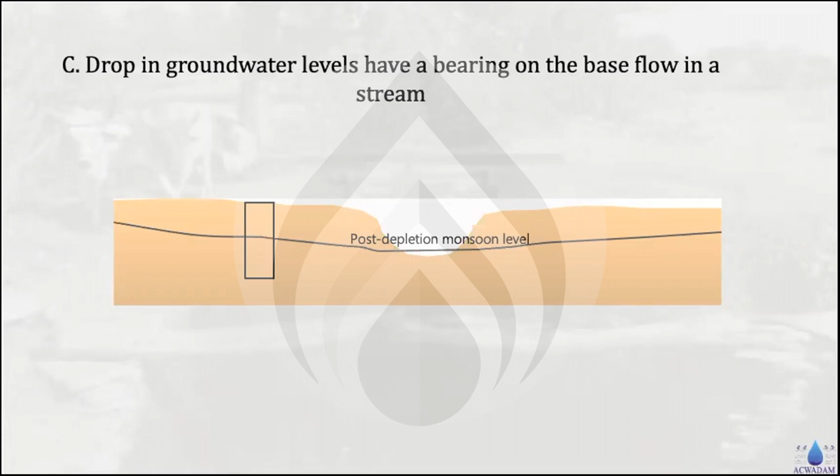And we are talking to the municipality and getting them to notify these areas so that they can be protected as natural groundwater discharge areas. I had a few slides on recharge, but I'm going to refrain from showing you that because recharge is something that comes to the human mind automatically as depletion happens. But we actually don't look at the discharge side. And the natural discharge side of groundwater is where the concept of groundwater in ecosystems begins. So I'll leave you with that parting thought.